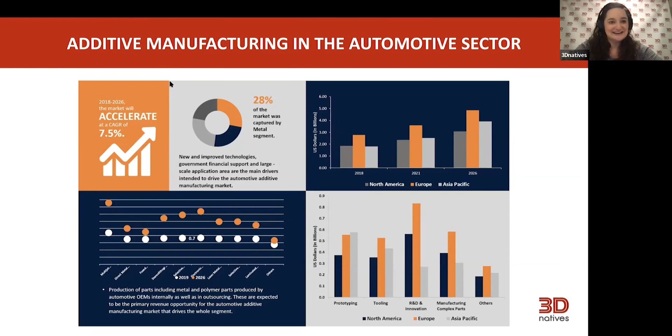We're absolutely itching to get sharing. Why don't we see hubcaps like that? I haven't seen any like that. Have you? No. You'll have to ask VW, or you could do it yourselves. Why not? Yeah, precisely that.

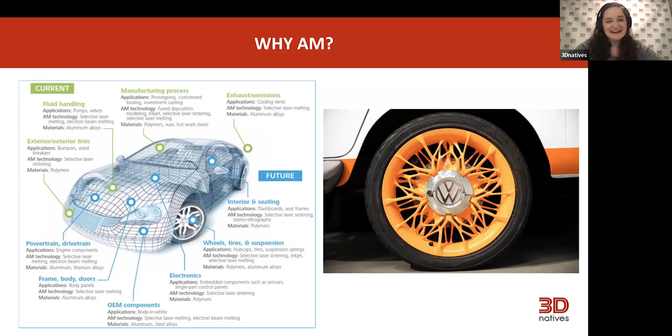I think in this particular case, I'm going to leave this slide up for just a second to say that this represents quite a comprehensive spread of different things that may be happening or are currently happening. Maybe it's in the near future, maybe it's in the far future.

But one of the things that it really misses out is that you could be doing the same things that you used to do before, but you're doing it far more cost efficiently, and you're doing it very competently, but more time efficiently as well, to very, very compressed timelines. And I think for us, because we're in the game of showing what something may look like, the closer and the quicker you can get to that point, the better, really.

So one way to describe what we do is that we're actually an industrial design studio. A lot of the work that we do is about new product development at the point where you're assisting with the discovery phase, where you're analyzing the needs and requirements for why something should exist in the first place. It's not just that we get given a specification and say, build this. There's plenty of people who can do that. And there was a time when that's all we did. However, I think our role has morphed into occupying more of that product development landscape.

The more high fidelity things you make, the more people ask and draw upon your expertise to show them alternative visions of that as well. To the point that we now have a clean room. We are manufacturing end components for a car that is in the luxury sector, and it's still classed as low volume when it comes to producing that specific part, and we'll get into that in just a second as well.

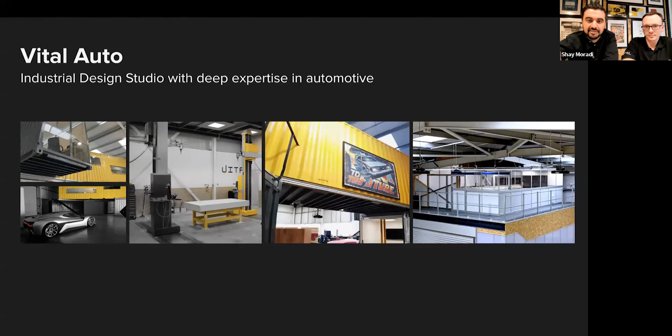Everyone comments on our offices looking cool. It was just the necessity of the space that we were in, and it was one of the cheapest ways in which we could set up some offices at the time and not make internal structural changes. So it's inadvertently cool, but we'll claim that it's cool for a reason, and it's all very beautifully designed, which it is. But I like coming here and working. It's got nice tones, and it's got an industrial feel to it.

That brings us on to how and why we use additive manufacturing. I think Ant is best placed to give you specific examples, because the more I dwell on it, the more abstract it seems. So Ant will give you the lowdown on how and why. Yeah, sure. So as Shay said, one of our jobs is to explore the unknown. People don't always come to us with a set idea or design. Sometimes it's just a vague thought in their head. So what 3D printing allows us to do is turn those ideas into tangible items that we can actually physically test.

So on screen, you can see there is a very boring looking door handle mechanism. Now, typically that would be an injection molded process. Obviously, it's not a route we want to go down when you're testing out a component. So that was actually printed on one of the Fuse 1s, and I think that was done in about 15 hours overnight. So what's the equivalent process if we were to go down the injection route? The reason we had that on there as an example is because there's not really any other process where we'd be able to produce that part so quickly. Just physically, CNC machining would not be able to achieve that geometry.

There's too many internal cavities, undercuts. You'd get close, but you won't get the physical part. In terms of the time frame, again, nothing out there really. So essentially from sketch to the design concept to the engineering, you're talking a significant amount of time compression, and without 3D printing, it simply wouldn't be possible.

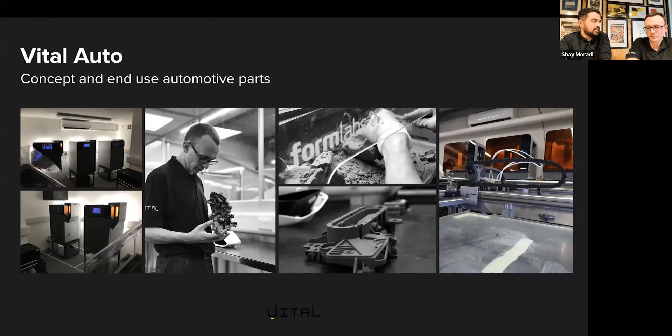But ultimately, you learn that in order to make something, and you'll see an example of this a little bit further down the line, you break it down in multiple parts. Anyone who's familiar with 3D printing would probably come up with those same challenges. Those exist on scale as well.

So just to sum up, without going overboard too much, we focus on high fidelity making. And sometimes that involves understanding the brief and doing all that kind of stuff. And it's become part of our identity. But really, we're taking something from a concept, a very nascent sketch, an idea, through to the final stage. And it just looks completely indistinguishable from, well, it is reality, really.

And we've been doing this for ourselves and for these automotive clients. And that is the landscape of the new and old, really. It does represent a significant footprint in automotive when you consider some of these companies are actually comprised of multiple companies. And these are the only ones that we can actually put the logos on there and mention. There's plenty more too.

What does it actually look like, though? How high fidelity are these things, what varying degrees of resolution does the additive manufacturing come into it, and how sustainable is it? Yeah, looking at the screen, you'd probably be hard pressed to pick out the printed parts from the non-3D printed parts. But in terms of what we do here, we can produce anything from optically clear lenses to, as I showed you before, structural, functional parts.

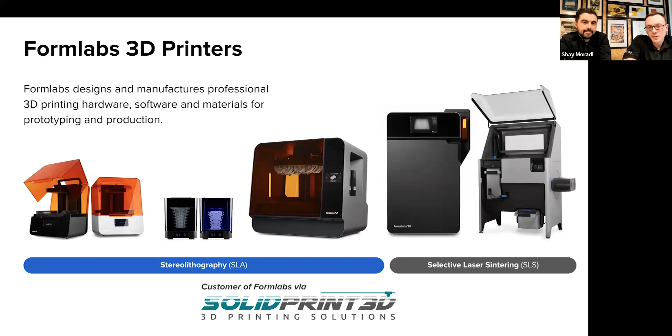So for people who aren't familiar with the differences between the technologies or processes, would you be able to give them a brief overview? So typically, their usages can be unlimited, but how we use them here at Vital is our SLSs tend to look after all our structural and functional geometry. We use our SLA machines for all our finished parts, so parts that you see. There's an example coming up actually. Yeah, anything that's on the surface, touch points, so tactile. And then we use our FDMs for our PLA printing, which produces our large scale sustainable substructures.

And there is a very vast and extensive library that Formlabs have that is supported. They've done all the experimentation and product development effectively. That's one of the biggest things for us: when you're working in a high jeopardy or mission critical setting, you really don't want to mess about and figure out what the different tolerances are, will this material match this other material that we've got, and what would the tensile strength of it be. It's great to do experimentation in your own time, but with Formlabs in that professional setting, they've done all of that and taken the uncertainty out. So if you want that certainty of outcome, you've got access to one of the best material libraries out there.

Not only that, with our SLA machines, it enables you to do material changes in under 30 seconds. So if you want to switch between materials for various projects, there's no real time constraints or downtime. And when there is, you're talking a matter of hours and a bit of work. That's for the SLS stuff. Yeah. Great.

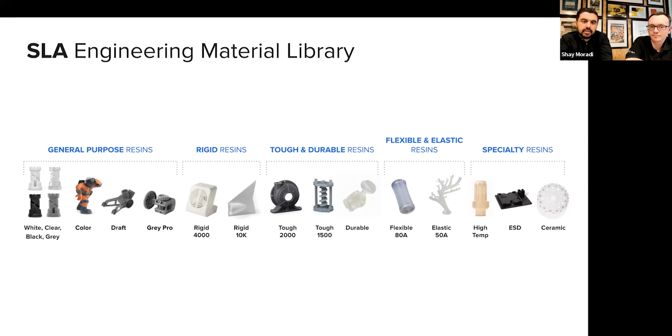So that obviously moves on to the SLS material, as we were saying. So we predominantly use nylon 12 here, simply because it's a solid, good all-round material. Nylon 11 is slightly more for production parts, which we are slowly moving into now. But again, material change for a Fuse 1 is not minutes, but it's not days like you typically find in a much larger format SLS. You could probably do a full material change in under an hour.

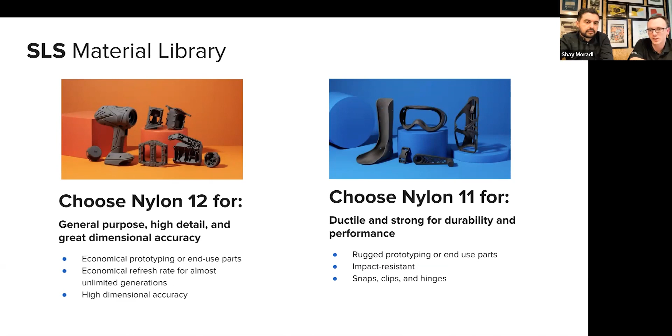I like that. We're calling it print farms now. That's got a matrixy vibe to it. It's like cultivations, kind of. Yeah, I like that. Good.

Okay, so some applications. As I briefly touched on earlier, this is a great example of an SLA application. So what you see here is a proprietary item, an air vent from an existing vehicle on the road. We'd have a client approach us and say, I want to use this product in my vehicle, but I don't want to house it in the same way that the OEM does. So we actually utilized two materials from the SLA process here. We started off using the Formlabs draft material.

This prints about 200 micron layer heights and prints exceptionally fast. What that enabled us to do is come up with an evaluation, basically, to get a rough design, get the fit and finish correct. Obviously, with a part such as this, it's in the interior. You're looking at it all the time. The fit and finish has to be right.

This is something. So I'm from outside of automotive, coming at this, and I'm absolutely terrible at making things physically. I can produce something and get other people to make it, but in terms of physically making it, I don't get involved in that at all, because coming from a digital background primarily, my understanding of how tolerances work is so out of whack with the physical reality, where you have temperature variation, material structural variations, various forms of interference fit, and all of these very technical ways of describing how it's really hard to make shit, basically.

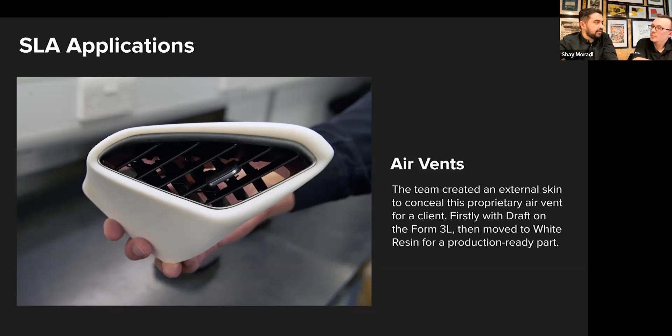This is why we use the draft resin, because that enables us to evaluate all these areas before we commit to a final production grade material. So the material you actually see in front of you is a production grade material with the final finish, which basically means it can go into the vehicle if you're doing especially limited runs. That went into the vehicle. I believe it could be a drivable vehicle. Yeah, that went straight into the vehicle.

This is another one where the physical HMI is so notoriously expensive to prototype, which means people end up with carryover parts. They end up botching and trying to wedge stuff into other things. But the ability to make custom tactile components is just amazing. And what you see there is essentially a hybrid of materials that are taking advantage of their main strengths, really. So again, underneath you're looking at a rigid material.

It's strong. It's designed to take the forces of a button push over a long period of time, and then on the top we'd actually have a tough material. So again, that would withstand the test of time of fingers pressing the buttons down, so you don't get that wear.

I'm just trying to give people a bit of an idea of what value is generated through this process as well, because I think people like attaching figures. I know we don't normally do this in our presentations, but design engineering aside, if you were to go to a product design agency and ask them to develop something like this, you're talking hundreds of thousands. Easy. Whereas when you consider the design engineering side and ultimately making it, the physical making isn't going to cost you that much, but when you combine it, you've effectively got 10 times the value, really.

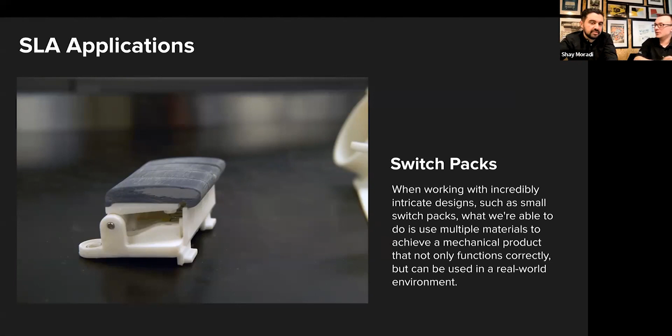Simply because interiors can be inherently expensive to produce at production level, even hundreds of thousands just on the interiors, production level. So this is a really magic application of it that I'm quite excited about. Yeah, so this was something we worked on closely with Formlabs. We had a project here where we were effectively looking at custom seals in an open and closed door environment. And again, naturally, you're looking at a tooled process to be able to produce these. There's not really any other way to do it.

So, as you know, Formlabs do a clear resin, a couple of different shore hardnesses, and we trialed some ideas with that. And we said, well, that's great, but the resin's clear. We need it obviously not to be clear. You can't paint rubber seals or anything like that, so as soon as you close the door, it's going to wear. And this is where we started working with Formlabs and injecting dyes into the resin to generate the required color we need. And we found a really nice formulation where we were getting a solid black production-looking door seal.

One of the things I love about Formlabs is their openness to listening to their customers. This was a perfect application where I asked the question and we said, do you know what, we haven't done that before, so let's give it a go. It's not a closed door scenario. It's, well, let's see what we can do. Let's try it. And I think we went through about 15 iterations of that part in terms of printing to get the color in and get the geometry right. But that was again fully supported by Formlabs.

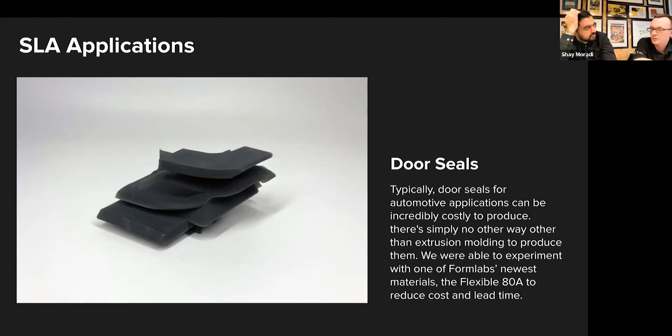And that's the magic bit, really, and as you said, it came out really nice. There are wall thicknesses on that seal that are going down to less than 1 mil in some areas, and we were still getting that resolution. So that was really nice.

Then in terms of SLS applications as well, it might be worth describing how. Yeah, so this is the door handle mechanism that we touched upon earlier. This is a great example because the level of complexity in a part such as this is phenomenal, yet the part itself wouldn't appear to serve much value to an end user because they would never see it. They'd never touch it. They'd never fully understand what it actually does or what its function is within the vehicle. Yet it forms an imperative part of the door assembly.

Yeah, and without it, you're looking at a carryover part. Exactly. When you're creating a new vehicle, the cost of actually making it properly in the old ways would sometimes eclipse the cost of the car program itself. Absolutely. For the levels that we're talking about. So door handles are especially tricky to get right. Who knew? Door handles, but then again, it's such a robust part. The simpler the part, the more problems it tends to cause you, to be perfectly honest.

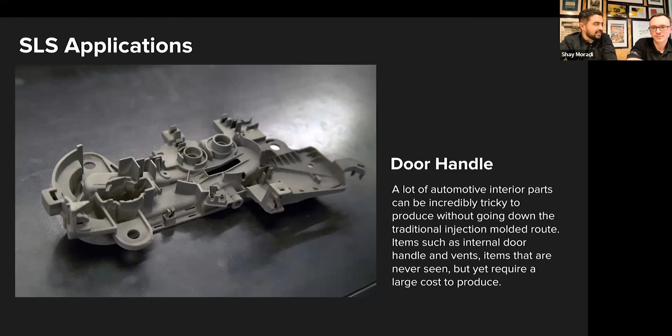You heard it here from Ant. The simpler the part, the more trouble it causes you. Wow. Let's go doing complex things, people. I'm sure they cause problems as well.

Nowhere near as complex. Obviously, the door handle we just saw. So why would we put that on an SLS machine? Yeah, it's one of those things. It's almost like a vanity thing that they want to customize something. We haven't spoken about the customization journey much, but obviously additive manufacturing, just like digital, provides you with the option to absolutely customize everything on a per customer level.

Imagine how excited and how enriched a collector would feel if they had their brake calipers customized for them. It's just the possibility space, right? It's the fact that you could really say that you are bespoke to the very last detail and actually do it. Not just say you can do it, but actually manage to pull it off. And we use this on a multitude of levels as well.

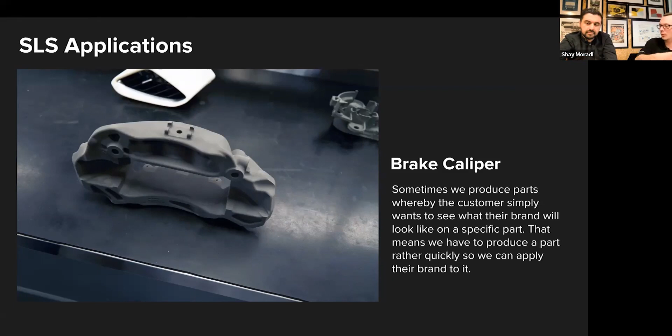So obviously you've got the evaluation aspect, as you mentioned, but we sometimes use these models purely for color and trim analysis as well. So if we want to try different calipers, we won't print one and then have to paint it each color. We'll make 20 different calipers overnight and we'll have the actual part on the car. So you're not evaluating a sticker or a rough mock-up. It's a physical color correct part that we can bolt on the vehicle and actually see what it looks like. Amazing.

So another big example which represents one of our really chunky and larger projects is our collaboration with Pininfarina, as part of the functional jewelry of this vehicle, the Battista. We initially took their concept through to a working physical prototype of it, including all the interactive lighting components. And one of the things that really excites me about it is, how do you imbue something that's 3D printed with a bit of electronic magic, to be able to play around with those different tolerances, to be able to work out the fits,

to be able to see it come to life is one of the most magical things that I've certainly experienced in automotive design, where you're taking something that was once a visualization or an animation into a real physical object that actually does something, that interacts with the CAN bus of the vehicle, takes the signals. And one of our other partners, Arduino, that we're going to be doing some promotional activity with soon, has had this enabling factor for us as well, where we can prototype things as fluently as we do with additive manufacturing on the electronic side. And then we get custom PCBs made to fit inside those parts.